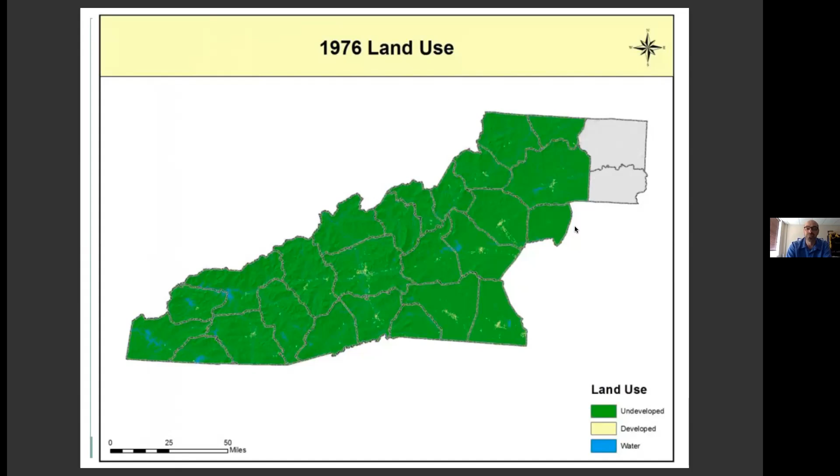You're looking at a land use map dated back in 1976, and the developed areas are shown in light yellow—it's kind of really faint and hard to see, but for those that remember Asheville back in the 70s, it was a very sleepy town. So the map doesn't really surprise a lot of folks that have been here for a long time.

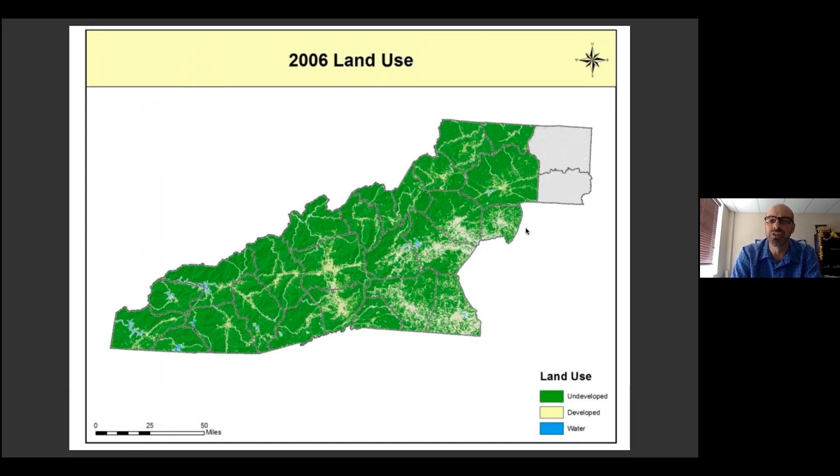As we zoom up about 30 years, you can just see the influx of development in Western North Carolina. You see a lot of creep coming in from the Charlotte area. But really what I wanted to focus on was within Buncombe County, you can almost see this X-Y axis form of development that starts to follow the corridors of I-40 and I-26. And that's to be expected—we see a lot of our growth patterns tend to follow our transportation networks, and we should assume that that's only going to continue in the future.

Keeping that in mind, it's helpful to think about what factors are driving that type of growth. One factor is our Tourism Development Authority has a healthy budget for marketing. We've seen an influx in tourism here, particularly in the last 5 years, where our TDA has had a budget of about 15 million to market Asheville, and they've been doing a really good job of marketing it to many of the communities that I think are going to be impacted by global warming more severely than we will up here in the mountains.

So in the flatlands of South Carolina, Florida, Tennessee, a lot of folks are learning about Asheville, and as they learn about Asheville and come to visit, many decide that this would be a wonderful place to live, to relocate, to perhaps retire. We're going to see a lot of growing development pressure in our area.

We also know that our metro region, known as the Land of Sky region, is approaching tipping 500,000. When we get to a population of 500,000 in this area, projected for 2025, for a lot of industries and businesses, that puts us on the map. 500,000 puts us across a threshold that suddenly makes it much more inviting for, say, companies like Pratt & Whitney to locate in this region.

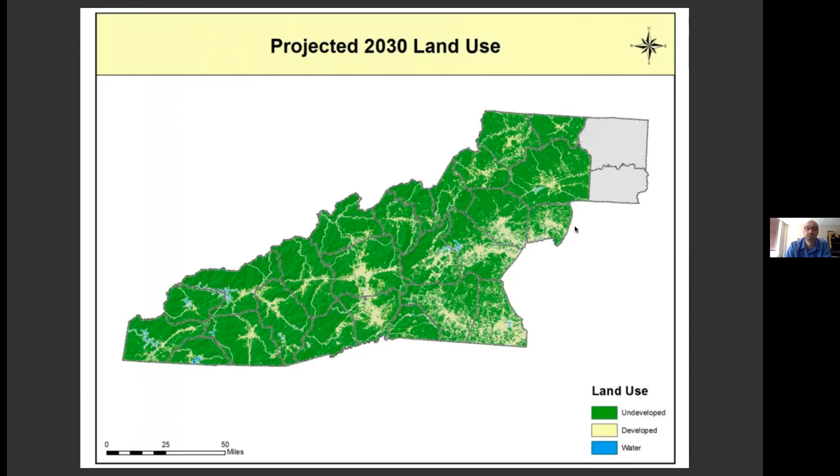So I think as we cross that threshold, we're only going to see an acceleration in growth. And what I want to do today is talk about how we can prepare for that growth and how we are best suited to adapt to that growth that's going to be driven by climate change.

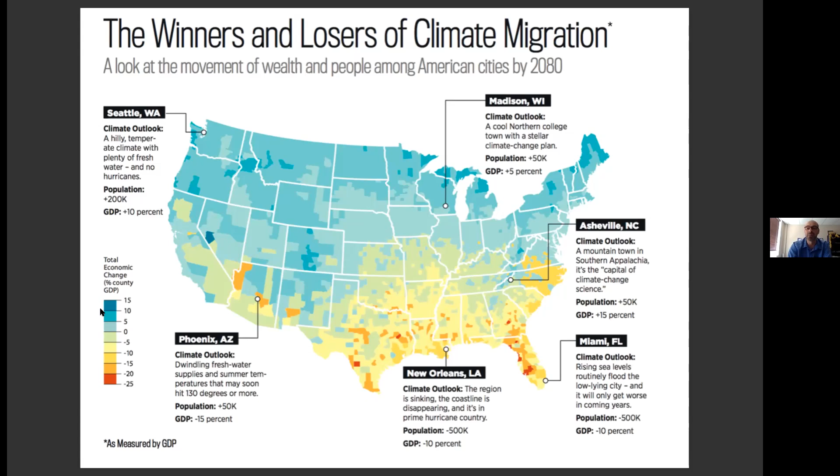So if we're going to talk about infrastructure, it only seems natural that we start with the I-26 connector. It is the project that brought the design center into being, and it's one that I want to talk about here because I think it will really shape the next 50 years of growth in our area.

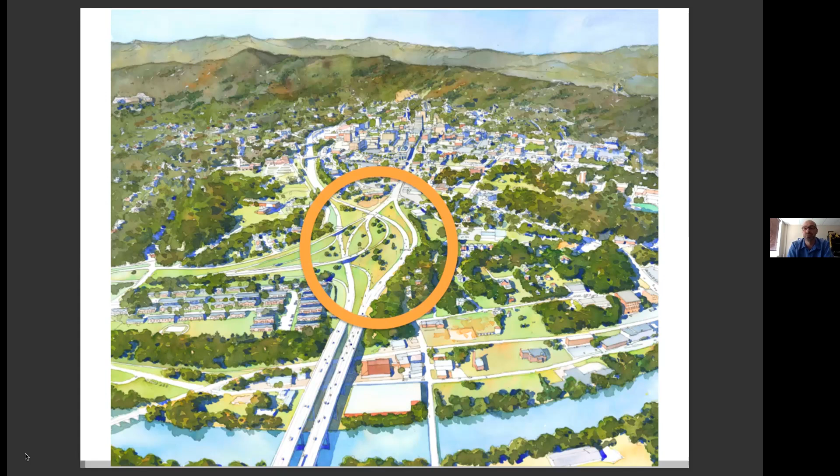What we had envisioned was how easy would it be if we could just point people west and say follow Patton Avenue all the way to the river. We see an incredible infill opportunity in land that will no longer be necessary. DOT will not need to control that land once we reroute I-26 and I-240 traffic off the bridge, and it frees up a significant chunk of land that we can use to extend our downtown, because our downtown is not going to be able to grow east.

We have the mountain, Beaucatcher Mountain, standing in the way. It's going to be very difficult for us to expand north or south because we have roadways, Merrimon and Biltmore primarily, that are pretty much maxed out and going to be very difficult to add more density to those corridors. So the most natural area for our downtown core to expand is going to be westward towards West Asheville and towards the Bowen Bridge.

In reclaiming that land, we have a real opportunity to bring all forms of affordable housing, office space, and retail to expand that downtown core along Patton Avenue. That was our original vision, and one that we held to for almost a decade before DOT finally acquiesced and was willing to consider our alternative. That was in 2016.

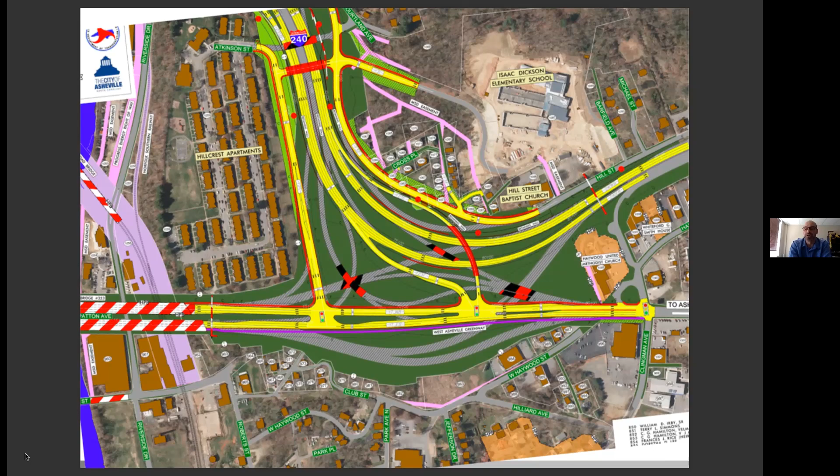So we took a look at what kind of land would be available if DOT had gone ahead with their plans, and we came away with maybe 6 acres of developable land. But even if we were to develop it, we weren't sure that it would function necessarily the way we would want it to for an urban corridor.

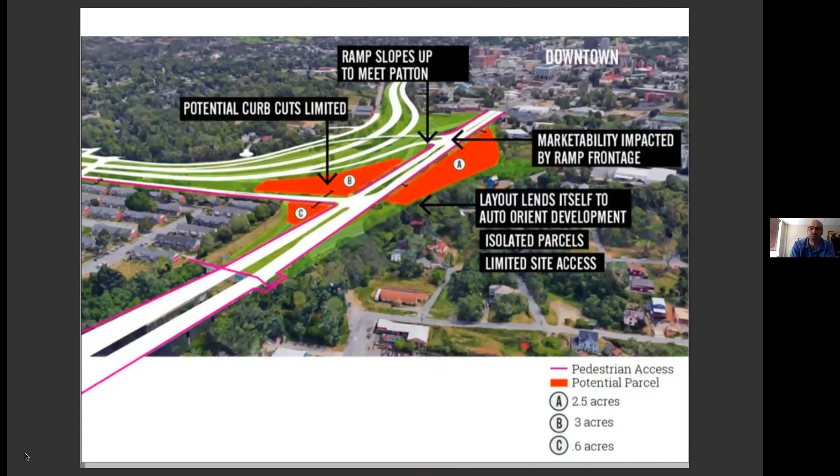So we engaged the community. We engaged WeCan, the Hillcrest, and the Montford community, and brought together a team of designers to work with community representatives to explore a charrette of how this area of land between the Bowen Bridge and the Clingman intersection could be redeveloped in a way that would really allow our downtown to grow the way we intended. What we came up with was a design that opened up almost 13 acres of land for redevelopment.

It provided a direct connection for the Hillcrest community that you see on the left-hand side here. Hillcrest has been isolated from the rest of our community with a one-way in, one-way out access point off of Courtland. That made it really difficult for people to access regular bus lines on Patton Avenue. It was kind of one of those can't get there from here situations for Hillcrest members, and we wanted to provide a direct connection to Patton Avenue for the Hillcrest community.

Just from a public transit standpoint alone, it gave an incredible opportunity. And any development we saw in this corridor would be directly accessible to the Hillcrest community. So we also looked at potential north-south connections between Hill Street and Hilliard.

You'll see in number 2 where you see this roundabout, we saw real value to creating a north-south connection and giving people an alternative way to get down to the River Arts District and to the hospital, rather than having to go all the way up to the Clingman Circle over here in number 4. We thought there would be a potential to bypass that and give people a chance to cut down Hilliard.

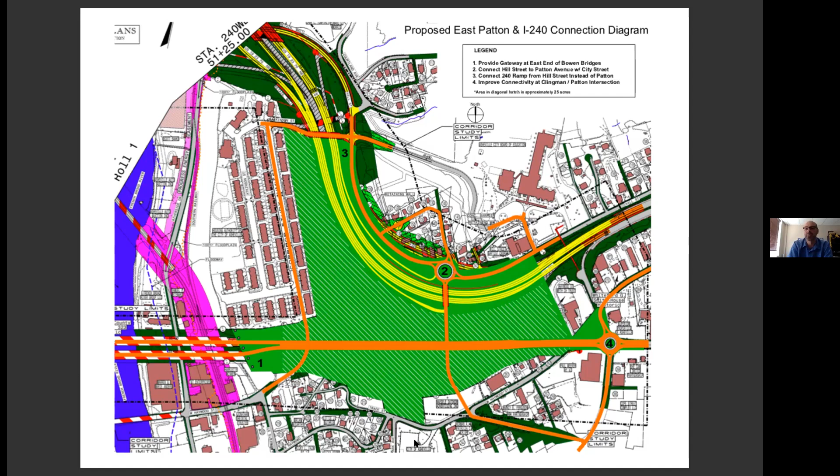And they were really willing to work with us and try and find ways to accommodate these changes. Now, their first pass at it, I think, missed the mark on several counts. They did keep the roundabout that we wanted. They did keep some of the north-south connections in a little bit of a way. And they do provide a little bit more of a direct connection for the Hillcrest community to Patton Avenue.

Still not ideal, but I think it's better than what was being proposed, which was bringing them all the way to the north end of their property and then accessing a service road all the way back to Patton Avenue, which basically would give some residents almost a half a mile round trip just to get about 100 yards as the crow flies. So we're providing a little bit more of a direct connection, but there's a waggle that they include in Patton Avenue.

And that's something that just does not work for us from a redevelopment standpoint. It takes away any opportunity to develop on the south side of Patton Avenue. And anyone that has experienced successful retail on the road level recognizes that you need to have that retail on both sides of the road. You need to be able to give people eye candy on both sides of the road to really attract people to a retail area.

And you're not going to get that if you eliminate any forms of development on one side of that road. So we have, I can say that we have a more updated design that I don't have a copy of with me right now, but we were able to straighten out Patton Avenue. We were able to present opportunities for redevelopment on either side of the road.

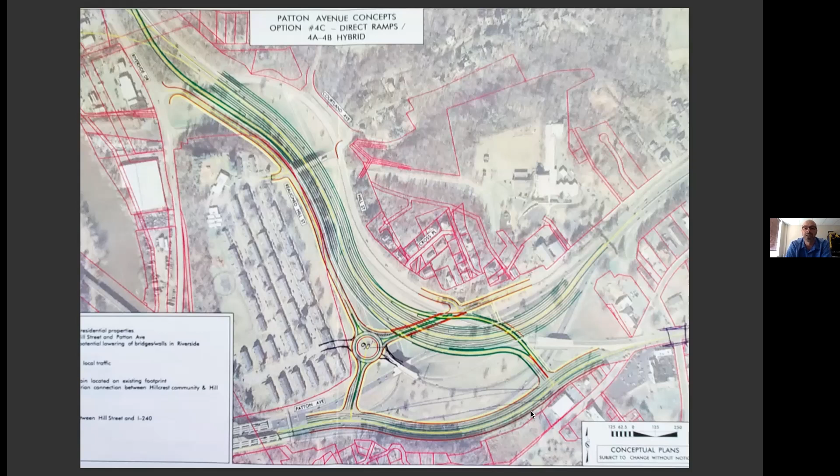And I think that we're getting closer now to scaling this project down to really what it needs to be, a human scale project, not necessarily a project designed for cars and trucks, but designed for the people that live here, and give us the opportunity to have infill development that will really extend our urban core all the way to the river.

But I am thrilled to say that we are able to reduce the lanes on Bowen Bridge. Since we've removed the highway traffic from the bridge, we now are able to go down to 2 lanes on either side of the bridge for automobile traffic, and that frees up 1 lane on either side of the bridge for full-fledged greenway construction. To give you a little bit of an idea, here's just some of the plans.

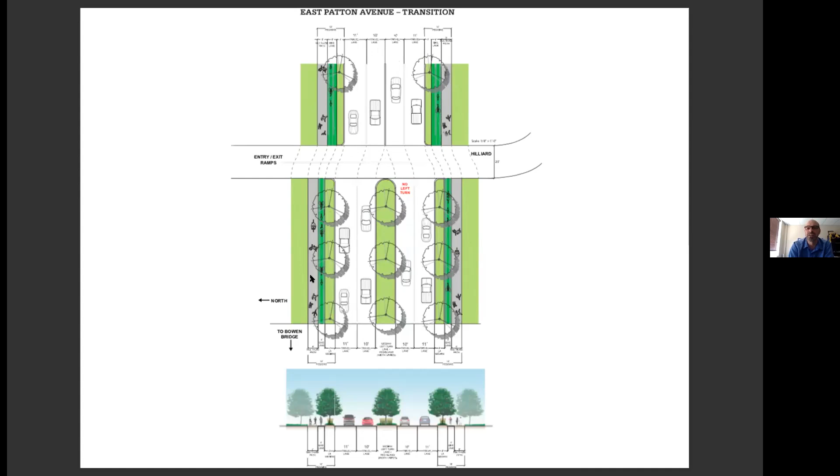If you're looking at the very top of the screen, you're seeing what you would be experiencing coming off the Bowen Bridge. And as it transitions onto land and onto what we would call East Patton Avenue, you get a little bit more. You can see bike lanes and pedestrian right of way, and I'll give you a little bit of close-up of what that cross-section looks like. But that's the cross-section that you can expect for East Patton Avenue, as you come from the bridge and work your way towards downtown.

We have a 10-foot multi-use path. We have a dedicated bike lane that's separated from traffic and buffered. I think it's going to create a really rich experience for people that are going to try and get from downtown to the River Arts District and across the bridge into West Asheville as well.

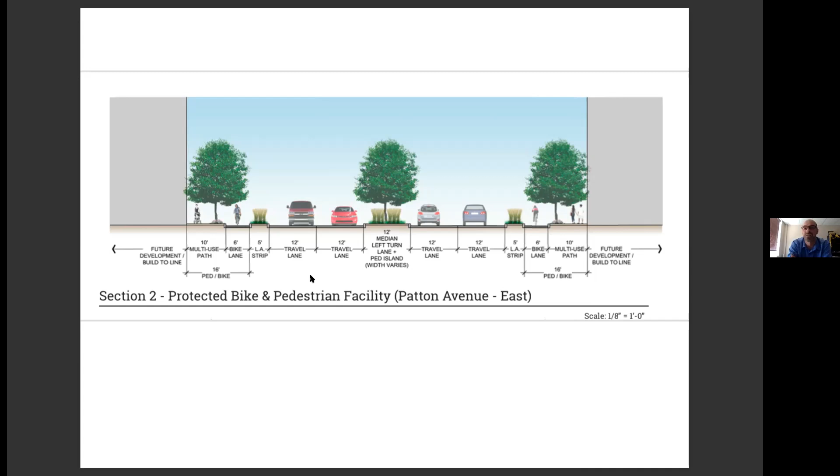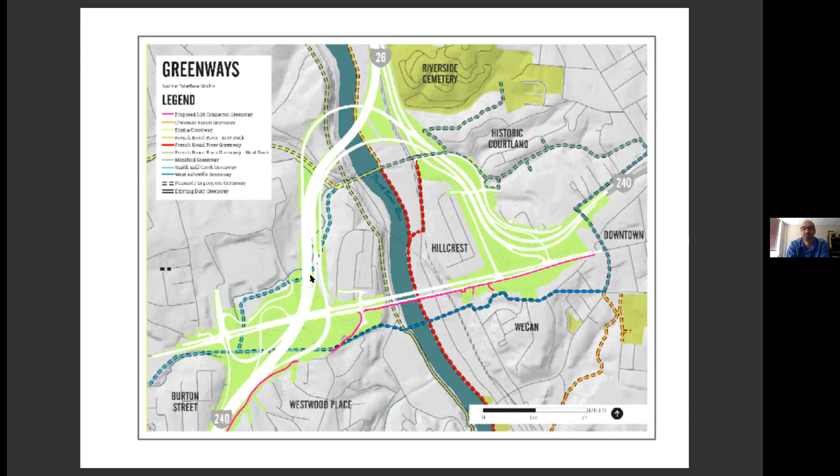It also is going to connect into a really rich system of greenways that are in development right now, some existing and some that will be delivered with the highway project itself. So we're going to see, I think, a whole new level of connectivity for bikes and pedestrians throughout our downtown and the River Arts District and leading into West Asheville. This is an incredible opportunity. It's a great way to take more cars off the street, and I think it's going to be a real positive for our community going forward.

So that's the highway project in a nutshell. It's really kind of, as you can imagine, much more sprawling in some ways and involves a lot more. We did see the project get bumped back by a couple of years with the pandemic.

So now the deadlines we're looking at, you could probably add 2 years to each one of these deadlines on the left. Section B in the northern section, that's the I-26 connector and the Bowen Bridge, where we've dedicated a lot of our time. We don't anticipate that kicking off until 2022 at the earliest, but DOT is now in the process of acquiring land and finalizing the details for this section of highway.

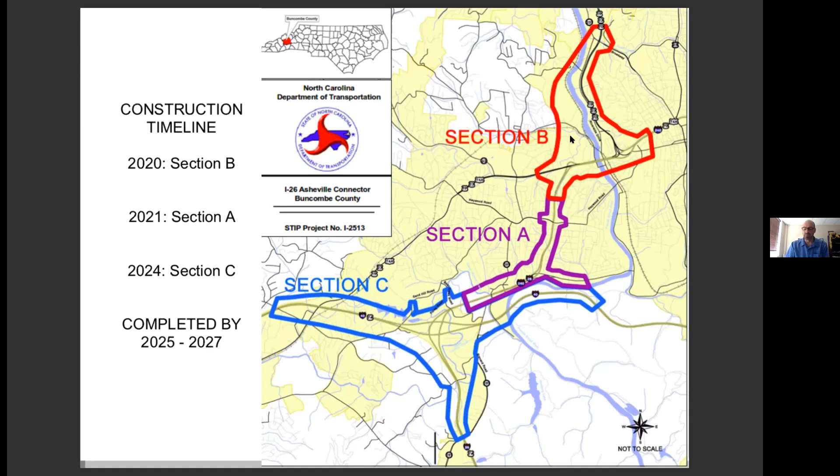As we wrap up the discussion around that piece of infrastructure, it's important to think about where all those highways are leading to. When we talk about this influx of population coming to our region, where are they going to live? All roads lead to home, so let's talk about home, let's talk about the housing crisis we face right now in Asheville.

Last year, as part of our Building Our City Speaker Series, back on March 6th, we hosted Patrick Bowen, who had just conducted an affordable housing survey of the Land of Sky region, the 4 counties that comprise Land of Sky, with a specific focus on Buncombe County. He had done that research in 2015 and came back with an update in 2019. So we hosted him in the very beginning of 2020, really just about a week before everything shut down for the pandemic, and he presented his findings.

None of this is going to be news to you. If you live in Asheville, you already know we're in a severe housing crisis. But what he really highlighted was the skyrocketing cost of housing in our area, where over the course of a decade, the median household price just shot up, nearly 100% increase in some cases.

At the same time, what we're seeing is a depletion of supply, particularly for houses below $300,000, and that's really where we're looking to focus, that affordable housing segment. Comparing availability in 2014 to availability in 2019, we saw a dramatic drop, particularly in the affordable housing segment, just in ownership.

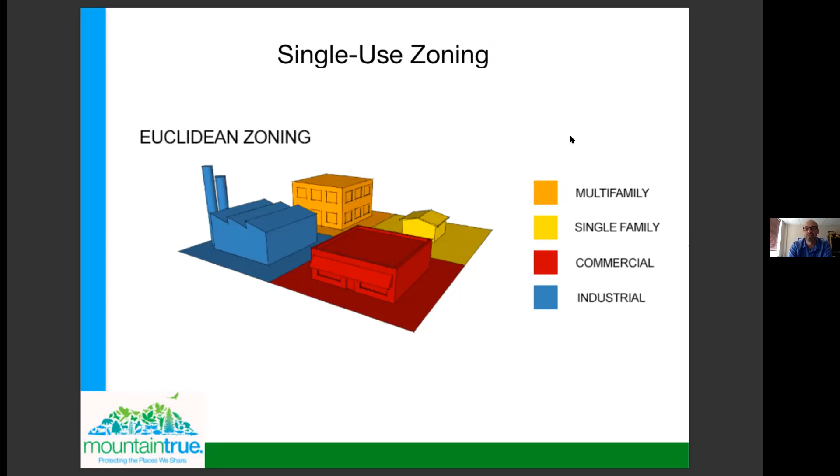And America's infatuation with the single detached family home. It really grew out of the 50s, and the concept of having your own plot of land and your own standalone home was really a new concept in the 50s.

But it was made possible by a number of different financial incentives, like the GI Bill, as well as, like I mentioned, the expansion of the interstate system that suddenly made areas that were more rural and out of reach of metro areas much more accessible.

So in Asheville, this is just a fraction of our city's zoning map, but you can see we have a whole bunch of different uses laid out here. But what I really wanted us to focus on are at the very bottom here.

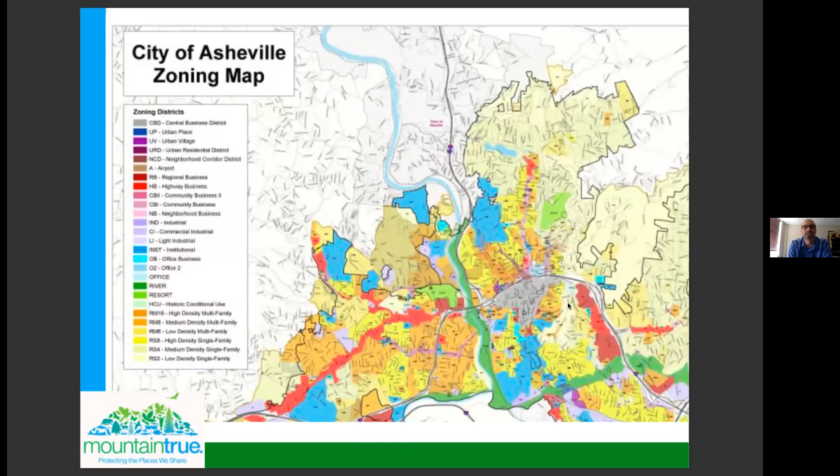You see there's these three designations of low, medium, and high density single family use. It's really difficult to tell on this map because the colors are so subtle, I think. But if we single it out a little more, the story it tells is that of the available residential land within Asheville city limits, about 68% is designated for single family zoning.

Now, I mentioned that single family zoning was a relatively new construction within the zoning world, particularly in the 1950s. What we find is that single family zoning tends to overlap very much with more affluent neighborhoods. Multifamily zoning, though it's hard to see on this map, tends to overlap with areas that had historically been redlined. Redlining was a practice used by banks and the federal government to classify which communities were safe for banks to invest in and which were risky. Those circled in red were deemed the most risky, and through no coincidence, those communities were more often than not African American communities.

So we're finding that many of the historically African American communities are zoned for multifamily, while many of the historically white communities in Asheville are now zoned single family. In many ways, this works to segregate communities by income, and because of the income distribution here in Asheville, it also tends to be very racially segregating. I think within single family zoning designations, we see a subtle form of discrimination that's been carried out throughout the 50s up to present day, forcing a very limited scope of housing choices available to us today.

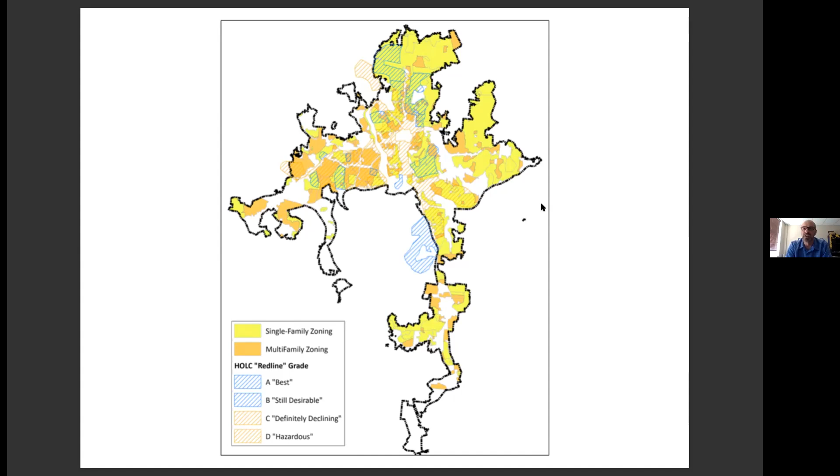Minneapolis recognized this problem recently in their own comprehensive planning process. They identified that of their residential land, 70% was designated for single family zoning, and they recognized that as a significant barrier to the African American community. So they did something really precedential: they upzoned all their single family lots to now allow, by right, duplexes and triplexes.

So any single family residence could now have a duplex or triplex built on it without having to go through any special hearing or seek any exemption. That's a seismic change in how we regulate land use. It signaled a change that Oregon picked up on, instituting a similar upzoning of single family zoning statewide. Even here in Western North Carolina, Senator Chuck Edwards introduced a bill—I'll touch on this later—to upzone single family zoning throughout North Carolina to allow duplexes, triplexes, and quads.

As you can guess, it comes with a lot of controversy. But our existing zoning regulations right now set us up for very limited choices in housing. What it's ending up doing is cutting out an entire segment of housing that used to be very popular and provided various forms of density in neighborhoods that were context sensitive and, in many ways, deemed appropriate. Instead, we're stuck choosing between single family detached homes on one end and mid-rise multifamily housing on the other.

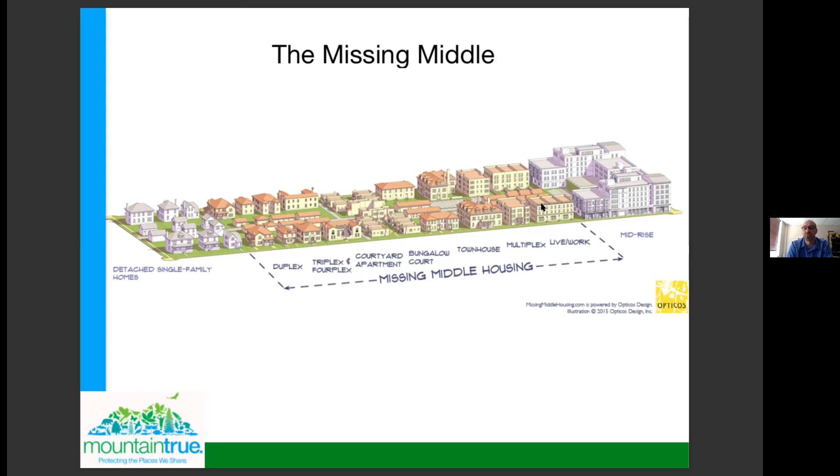So we're given this choice of trying to find a single family home at ever-escalating prices in neighborhoods that are becoming more exclusive and more segregated by income, or looking at these massive multifamily developments, with very little in between.

It strikes me as odd, particularly since I live in West Asheville, in the Falconhurst neighborhood. If I take a walk around my neighborhood, I can find all kinds of examples of missing middle housing right there. It adds to the character, it brings residents and rental units into our neighborhoods, so we find a mix of income and a mix of race that comes with that mix of income.

We're finding all sorts of examples that already exist and have existed in this neighborhood for years, but we no longer build like this. It really makes me wonder why. When you can take a quarter-acre lot and place 6 units on it, versus a single-family home that would occupy that same site, that's a huge increase in the capacity of our land to absorb the population we were talking about.

Even something as subtle as row housing, like here on Dunwell Ave, can provide a lot of housing on very little of the land, and can give us the opportunity to absorb this 50,000 people that we can expect over the next 50 years. We're even doing a lot of work with our streets to adapt and set ourselves up for this type of density.

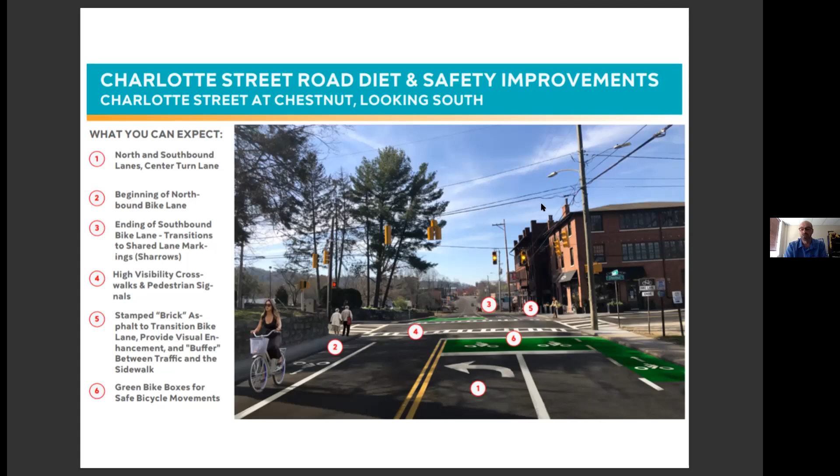It's important to note that Charlotte Street in this neighborhood is a historic district, and those homes are contributing homes to the historic district. So I certainly don't want to just glaze over that and say it's on balance worthwhile to add more density and sacrifice historic structures in light of that.

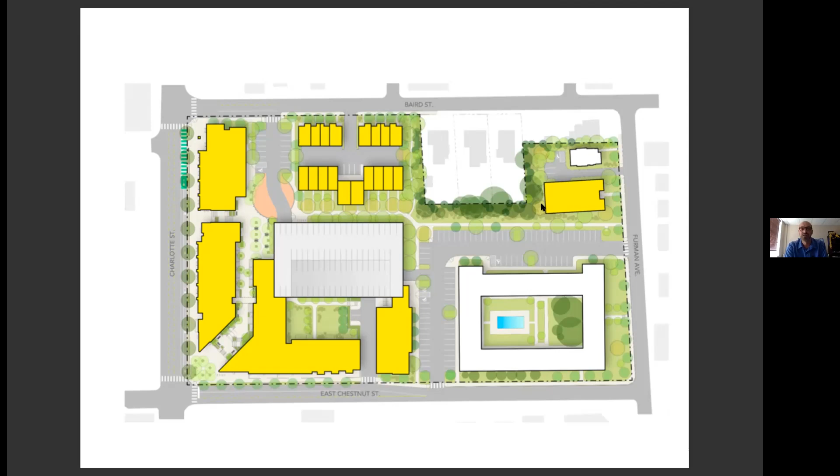But I do think it is worth noting that there is an effort to bring density to this corridor, and it's a corridor that has been set up to absorb such density with the road diet that's been instituted. But it should be no surprise that you're looking at a 4-story structure, and to me that kind of hits the threshold in Asheville for when people begin to freak out. I think anything over 3 stories gets people a little concerned about what's happening to their neighborhood.

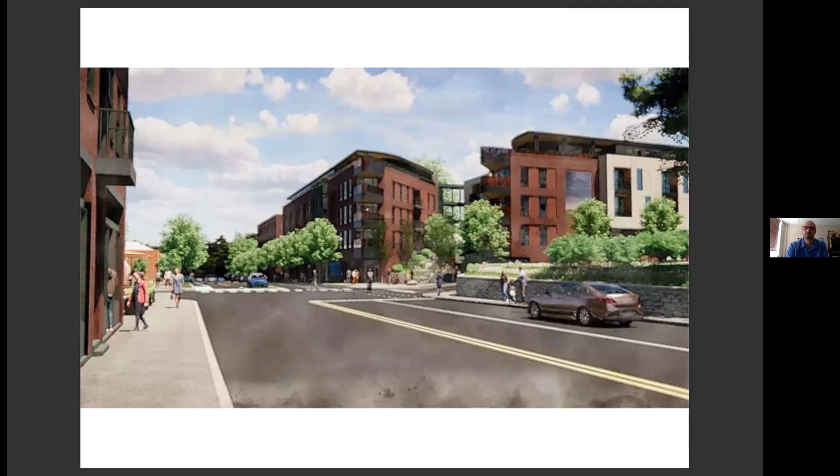And what's being proposed here is certainly more in line with what you would expect from an urban corridor, and you can see the context that this would be developed in.

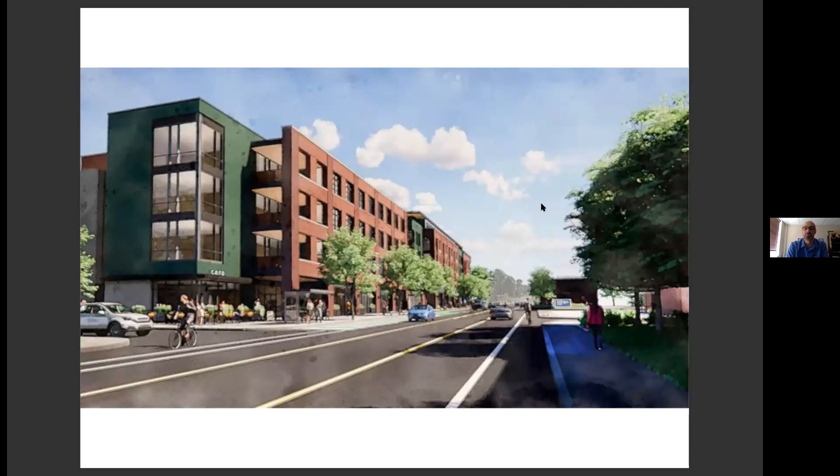Now, right across the street from the 101 block is the Fuddruckers site, and Fuddruckers is closed and moved. Right now, we just received another proposal for this site that would bring another, I think, 180 units to that corner. So now we're looking at another pretty dense development that would be brought to this node, to this Charlotte Street and Chestnut intersection.

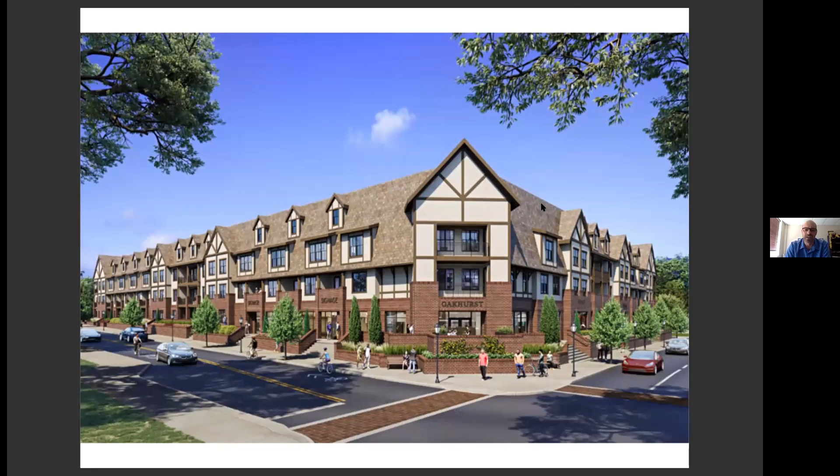And no surprise, it's drawn a lot of ire from the community, and we're seeing it in the form of protests. There's a Save Charlotte Street effort underway. They lined the block with bed sheets, kind of harkening back to a 1970s effort to highlight the Asheville downtown mall and what would have been lost — basically all of Lexington Ave and everything between Haywood and Broadway would have been wiped out for an indoor mall. The community really rallied against that project and in part encircled the property in bed sheets to highlight what would be lost, so that technique was replicated here.

But there's a lot of people that are concerned about bringing that kind of density to their neighborhood. They even staged a drive-in of sorts, where they tried to add 100 cars to Charlotte Street on a given Friday, I guess a Friday or two ago, to highlight just the congestion that it would bring to that area.

I think the projections I've seen add maybe 30 seconds to the travel time for residents in that area, but it's important to note there is a lot of resistance to bringing this form of density within a stone's throw of our downtown. There's a lot of community resistance to bringing that kind of density there.

A lot of people will characterize it as NIMBYs, or not in my backyard. Folks that have had the good fortune of landing in this neighborhood, in a house that was developed there and probably displaced trees in the process, nonetheless once they're there, they want to be able to shut the door behind them.

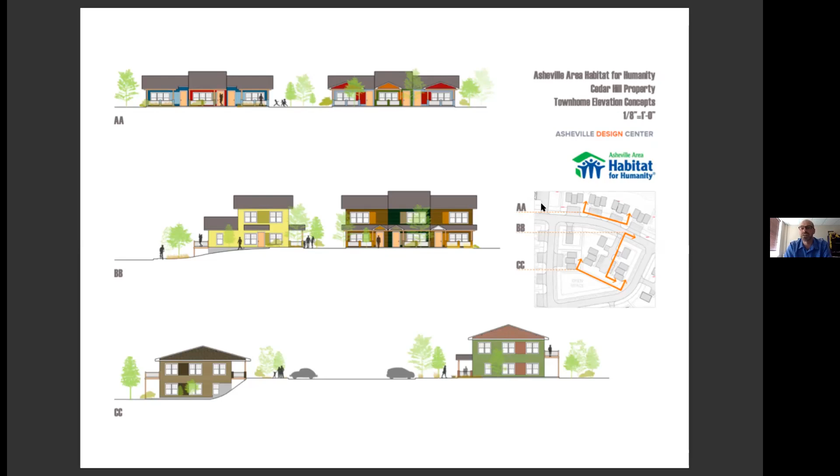These are just some designs for duplexes and triplexes that the Asheville Design Center created for Habitat for Humanity. Habitat has for years prided itself on being a developer of single-family, affordable units. But even Habitat has recognized the need for change and to adapt, recognizing that as they build within the city limits, the need for density is there, so they're open to exploring designs that bring more density to their neighborhoods in the form of these duplexes and triplexes.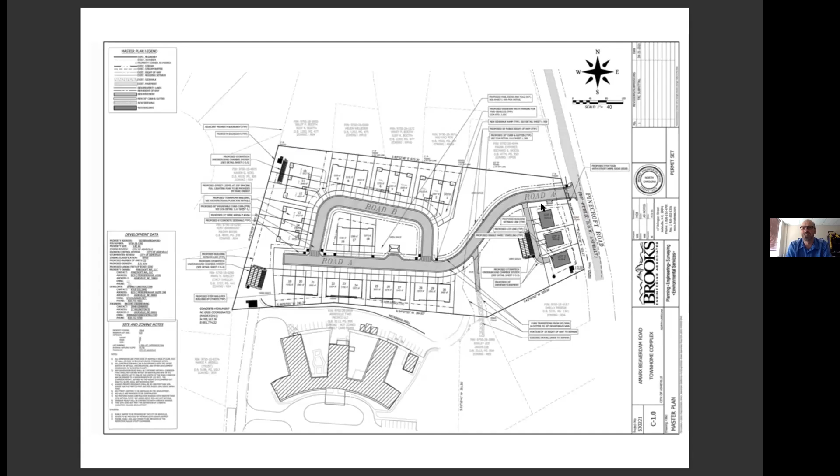You would anticipate that with this type of reaction, we must be talking about some kind of massive development, when instead what we're talking about is 10 triplexes on 6 acres of land that are already zoned for that density. So by right, the developer would have the ability to develop 10 triplexes, 30 units on 6 acres of land, and yet the community has rallied vehemently against it.

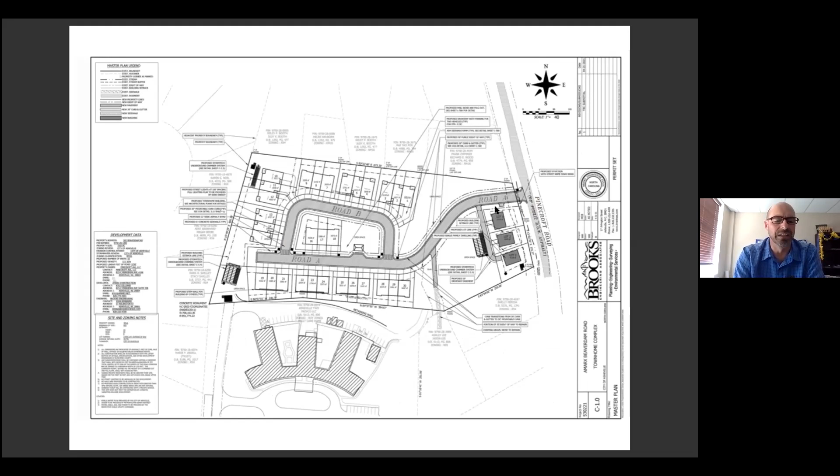So even when we try to bring more subtle forms of density to our neighborhoods, we're finding a lot of resistance to that. Ironically—or maybe hypocritically—while they are opposed to the development of 30 units in the form of triplexes, they are totally open to 10 single-family homes being developed on that same lot.

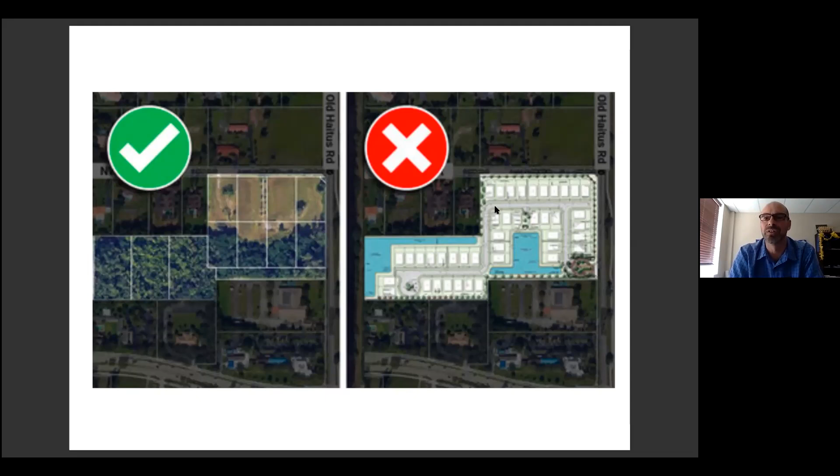So I believe the claims for protecting trees and wildlife ring a little bit hollow when they're willing to develop that land—only they're willing to develop it as single-family homes and not as potential rental units. It really makes me question what's motivating that.

As I mentioned, Senator Chuck Edwards introduced a bill earlier this year that would redefine single-family zoning to encompass duplexes, triplexes, and quads. This actually gained bipartisan support, and it found developers, the Home Builders Association, private property rights advocates, and new urbanists all on the same page, all advocating for something like this.

Now, there is something to be said for this kind of top-down legislation from the state, legislating what the cities can do, and I would argue that the cities are more well-equipped to deal with this on a local level.

But we live in a state where it's a 'mother may I' state. It's called Dillon's Rule, where we basically need state permission to change something like this. Although Senator Edwards introduced this bill, it did not gain the kind of support it needed to take root.

There's an argument that by introducing duplexes and triplexes into these neighborhoods, we will fundamentally change their character. Again, I'll point back to the Falconhurst and Brucemont neighborhoods, and really every neighborhood in Asheville that already has this form of housing, with courtyard apartments and cottage clusters that have been part of the context for nearly 100 years. This is not a grand departure from how we develop.

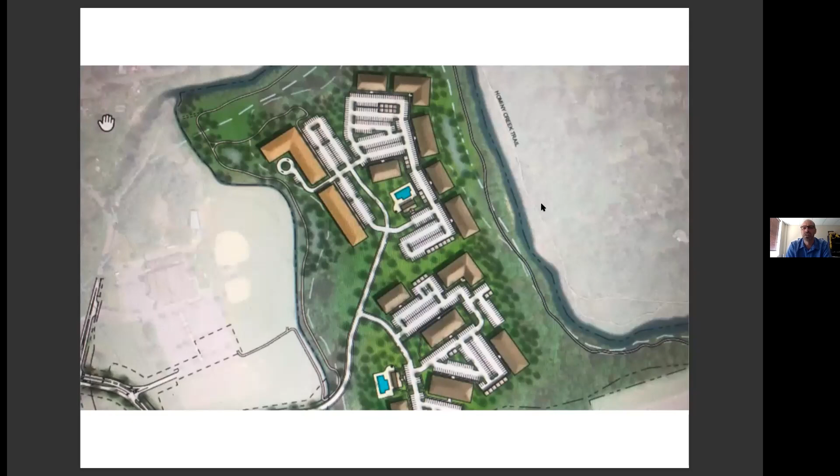So we are now seeing proposals right on the edge of the city bringing density. This was originally 800 units, scaled back to 620, right on Hominy Creek, opposite the Malvern Hills neighborhood. We'll continue to see more proposals like this, and I'd project we'll see this type of development eventually find its way to valleys like Big Ivy Valley, only about 30 miles or 30 minutes outside Asheville. Once we complete I-26, we'll make the commute from Big Ivy to Asheville that much easier.

It's only going to induce development on some beautifully flat land, which is so hard to find in our region, owned by a number of farmers over 60 years old. We're going to see those properties begin to turn over. I think it should be expected that if we can't find ways to bring density to our city, we're going to push that density to areas like Big Ivy.

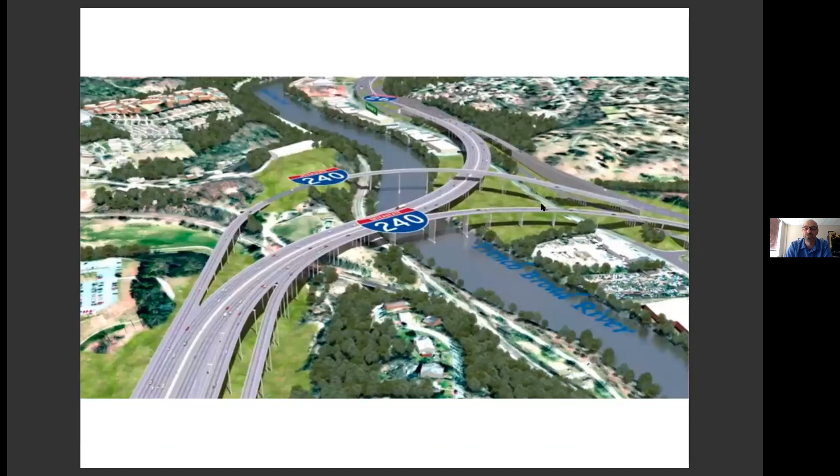And if we do that, the highways we're building today are probably no longer suitable for the volumes of traffic we're going to generate in 20 to 30 years. That's only going to mean we're going to need a bigger boat.